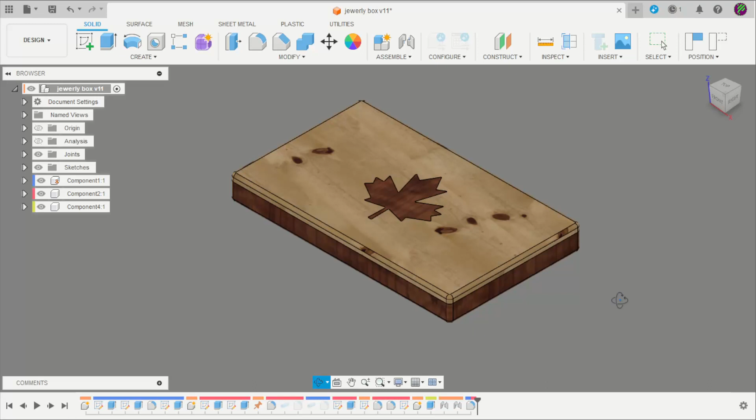For today I will show you how to create this project that is a jewelry box with the Canadian leaf. I will show you how to create these three parts and two methods how to create this emboss.

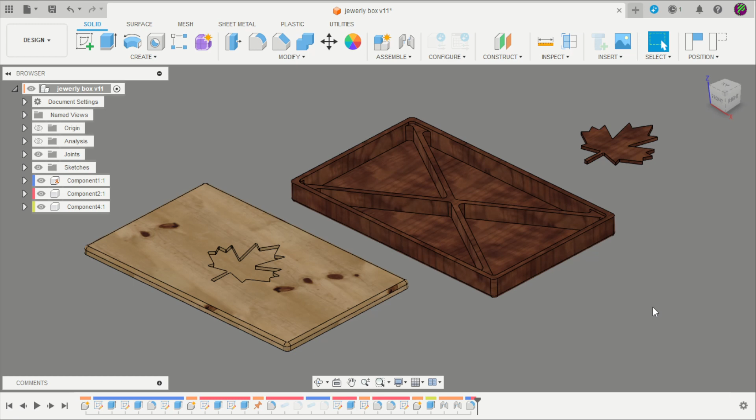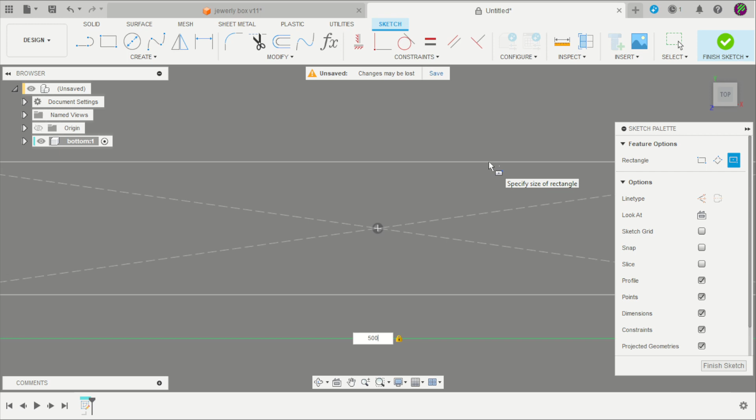Let's start. Create a new design. Create here a new component. I will call it bottom. Start to create a new sketch. A rectangle by the center. The first two measurements are 500 millimeters by 300 millimeters. Finish the sketch. Extrude with 40 millimeters.

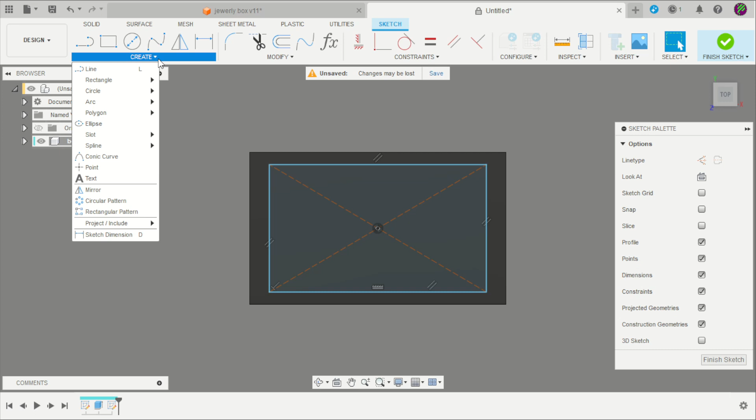Create a new sketch on the top face. Repeat the process with the rectangle. Here on the Create tab, select Project and project this top face, and apply here a distance of 10 millimeters here and here. Now we have our reference.

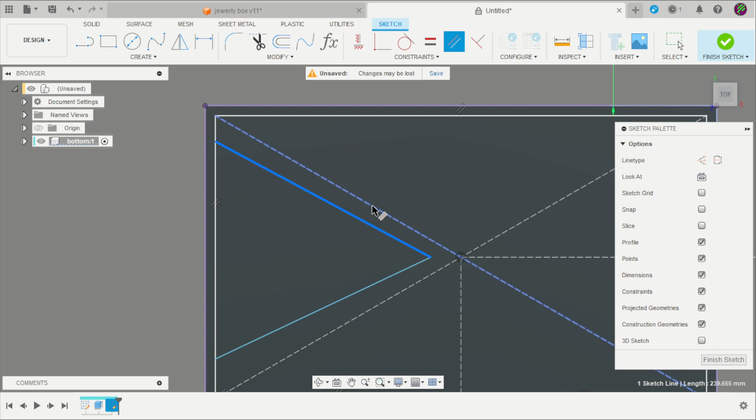Now we need to create two construction lines. Change here to construction. Click on the center. One line on the vertical, other line on the horizontal. Here, create another line, returning to normal, and create two lines like that, and apply a constraint of parallel, and that is parallel.

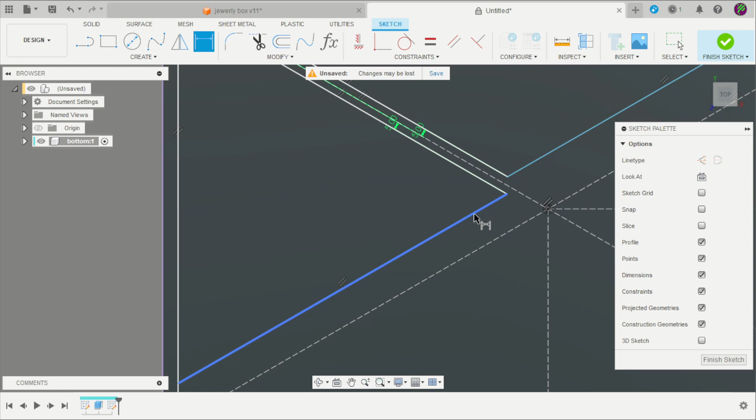The same for that triangle. Certify that the two are parallel, okay, and apply a distance of 5 millimeters. The same for that side. Here is 5 millimeters, and here is 5 millimeters. Okay, now we have these two triangles,

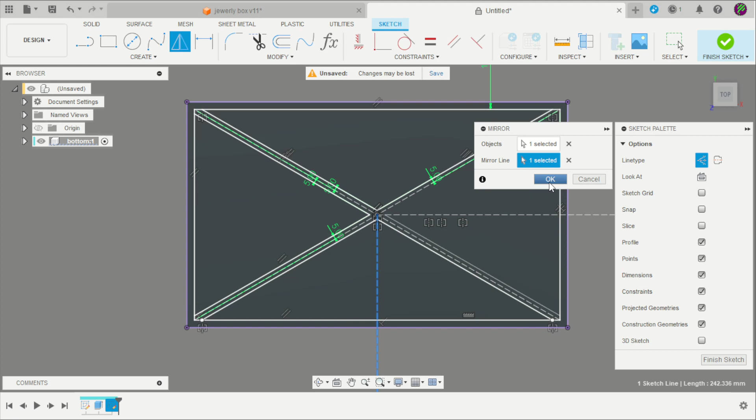and we will repeat using the mirror tool. Select the two lines, select the horizontal, and click OK. Repeat the mirror with these two lines that we created. Select the mirror line and click OK. Now we have these four triangles.

Finish the sketch. Select the extrude tool. Select all the triangles and apply minus 35 millimeters and remove the material. The measurement is here on the drawings. Now we need to apply a fillet of 8 millimeters.

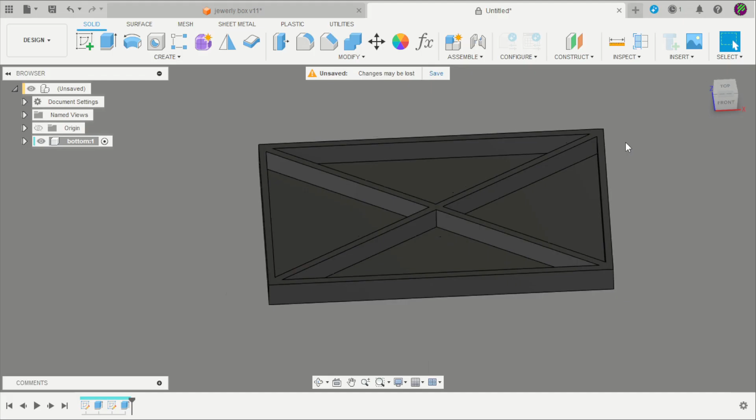Create a new sketch here on the top face. Create a new rectangle by the center. The same process that we did before. P for project and project these two lines here, and apply a distance of 10 millimeters here and here, 10 millimeters.

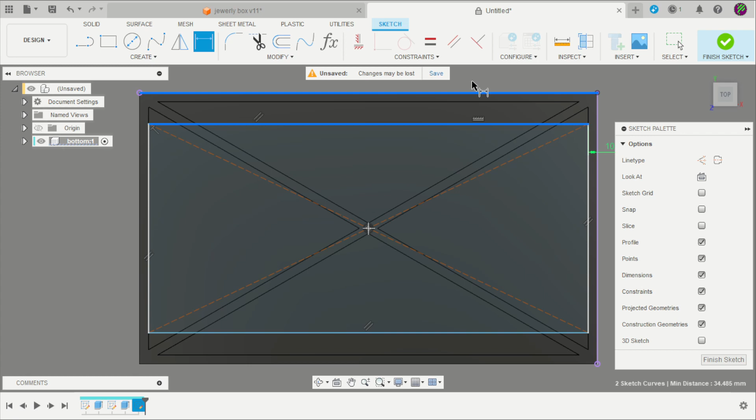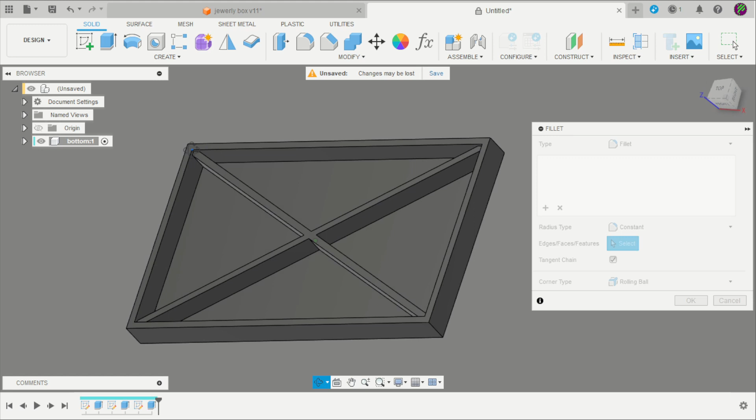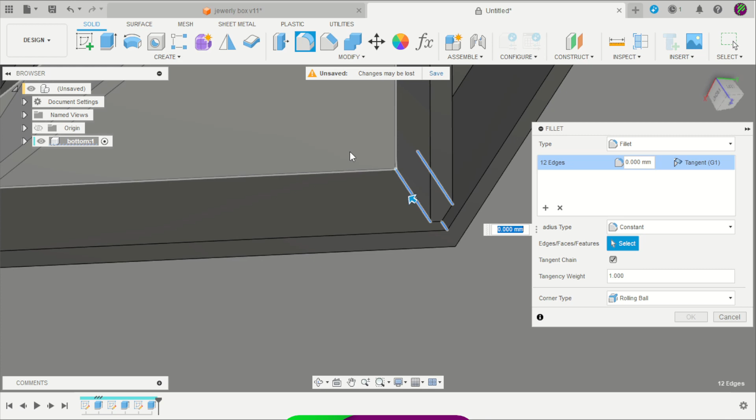Finish the sketch. E for extrude, select this and apply minus 5 millimeters to remove the material. Now we can apply a fillet. Select all these corners here, here, and here. Repeat that process here and here. And apply an 8 millimeter radius.

Create another fillet here, hold Control and select these edges in the middle. Hold Control and click on this edge and click OK. Okay, now we have this part done. And I will apply a fillet on these edges at the end of the project so that I can apply it to the two parts.

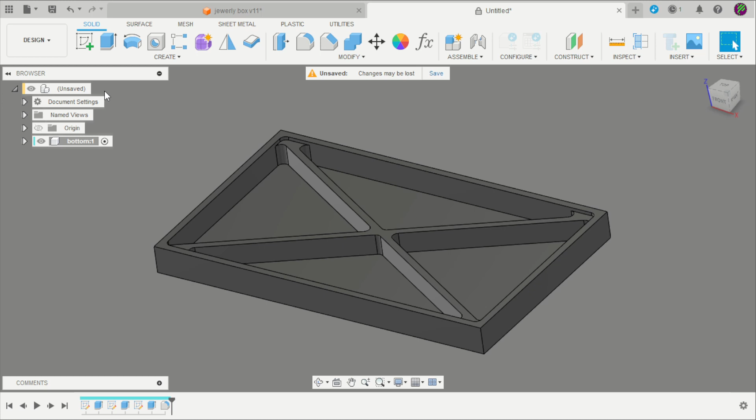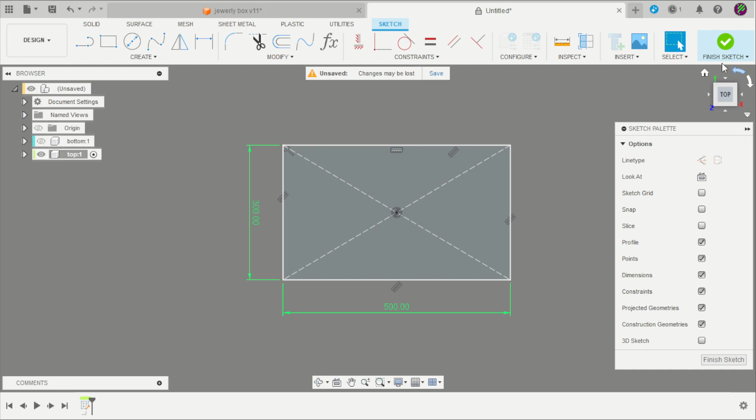Return here to the main project, create a new component that is top, hide the first one and create a new sketch. Repeat the process with the rectangle, the same measurements, 500 by 300. Finish the sketch. Now the measurement for that is 20 millimeters extrude. E for extrude, 20 millimeters.

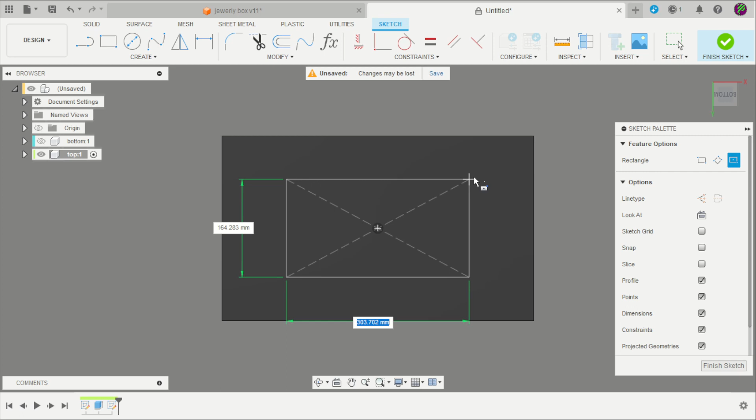Here on the bottom face, select to create a new sketch, a new rectangle by the center, here, and P for project the face, and apply here a distance of 10.3 millimeters, and here, 10.3 millimeters.

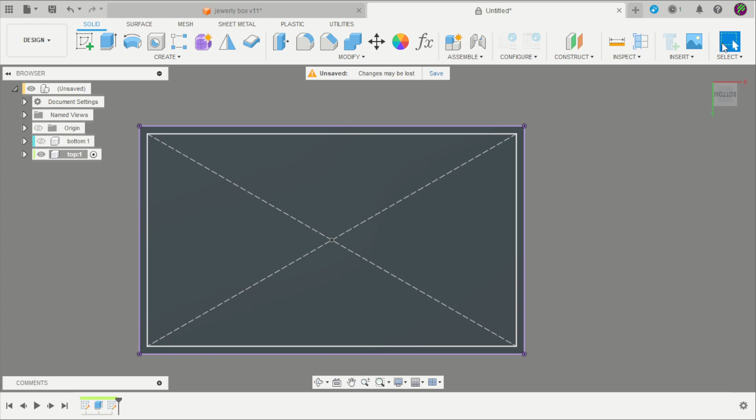Select the extrude tool, apply 5 millimeters, return to the main project, and unhide the first component.

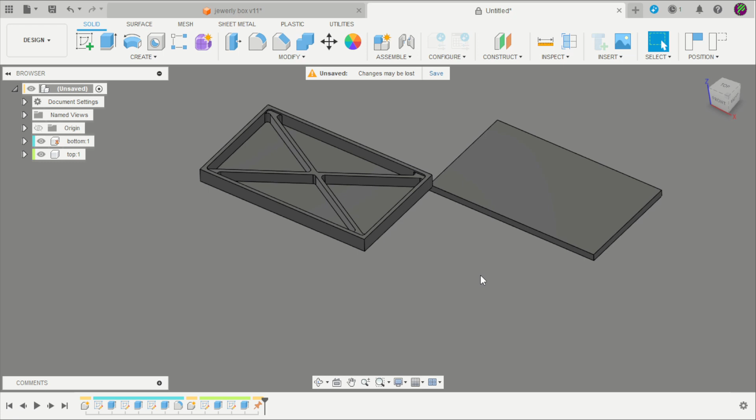This first one needs to be grounded so we can constrain the second one above the first. We'll do that now: press J for joint, hold control, click on the center point here, and do the same for that face, holding control on the center point.

To make it easier to identify the project, we can apply Shift N to create random colors. At that point, we can do these two processes to apply the emboss of the leaf.

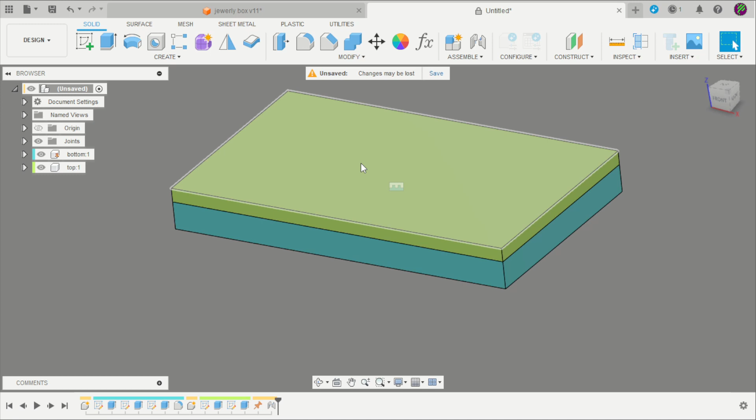We need to save first, here on the file of the leaf. I showed you in the last video how to design that. The link is here on the cards.

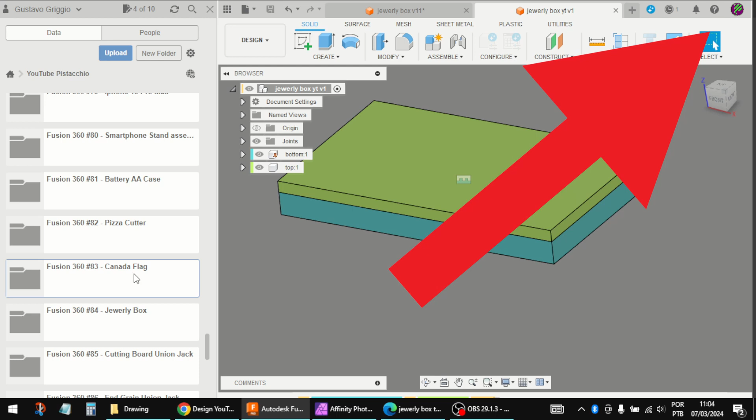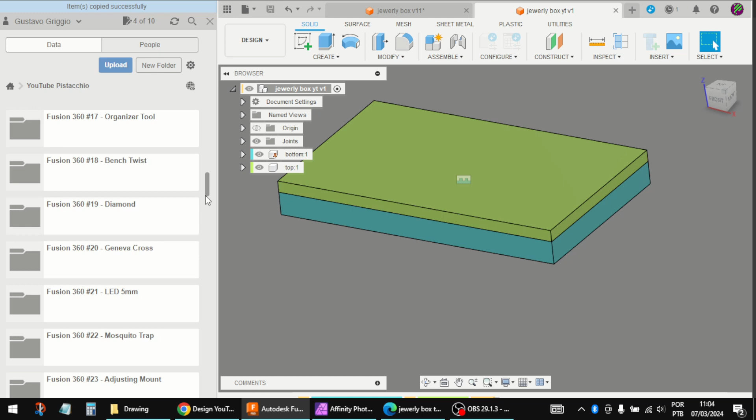Now, with the right button, we copy and choose paste, the jewelry box, and click copy. Return and paste here. Now we have a copy of the Canadian flag from the previous video on this project.

We have two methods to do that. I can import, just click and drag. The flag will be here, this component.

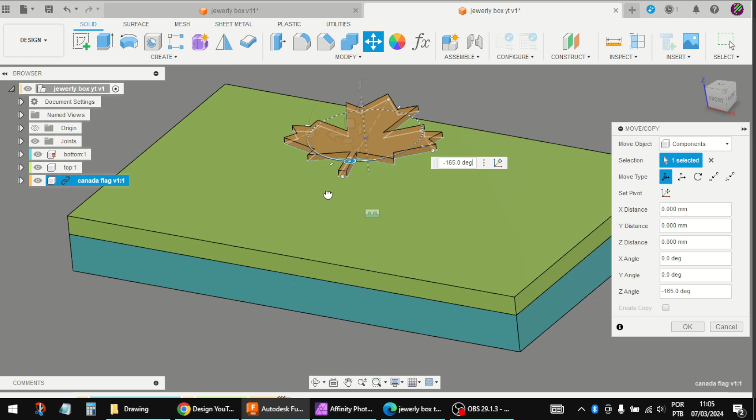I just need to click apply.

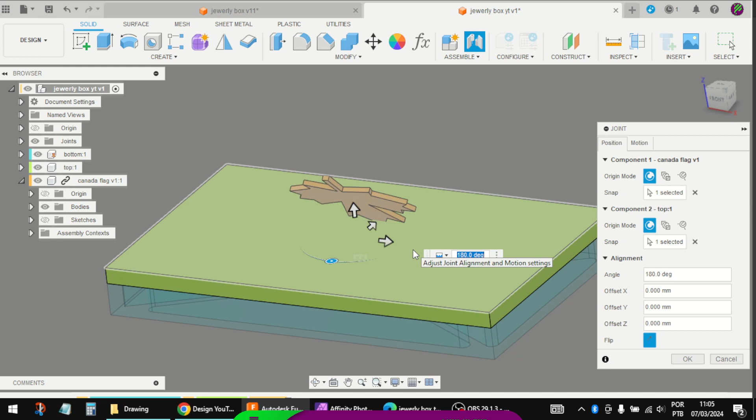You can hide this sketch and just click for the joint, hold control, select the center point, hold control on that face, flip the direction, and click OK.

Now we can use this combine tool. Select the target that we need to remove material from, and click on the leaf that we'll use to remove the material. Change this to cut.

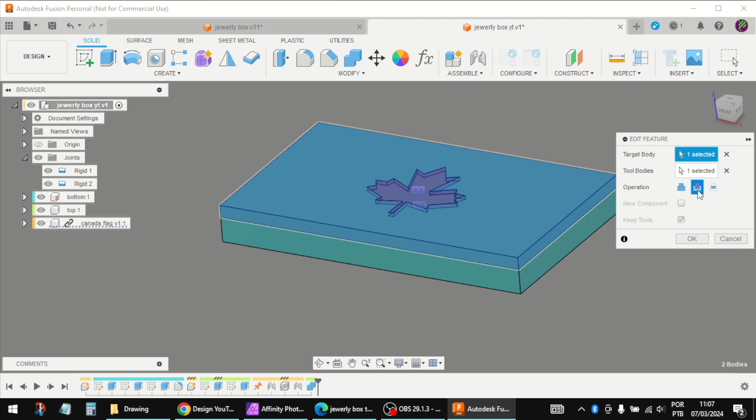Now I can suppress this joint and move it, and now I remove the material.

Or I can create it differently - I will delete this combine, that joint, and that component.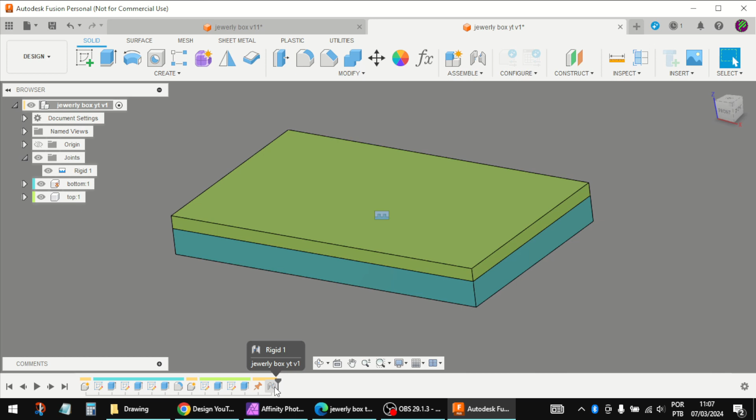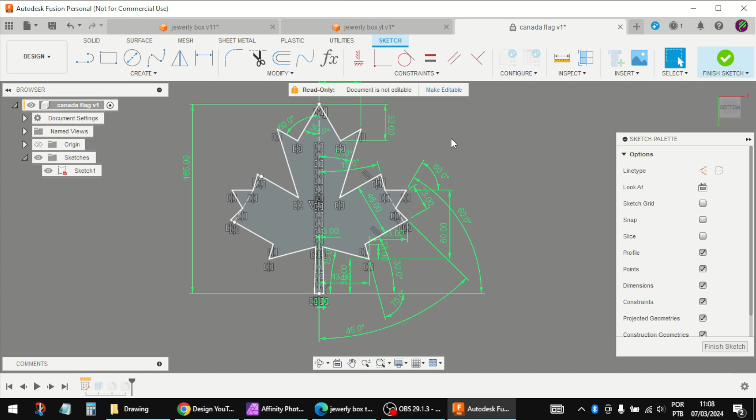Or you can go here on the project, just select the sketch that we created for this leaf, select all the lines here, and copy. Go to the project, here on the top component, hide the first one, create a new sketch, and click Ctrl V.

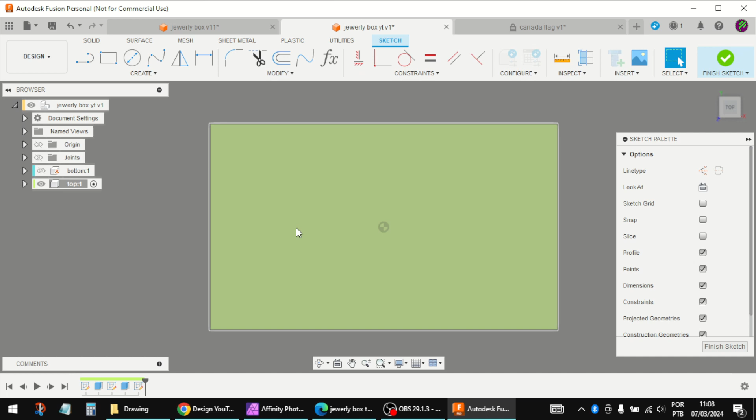Now you've created a copy of this sketch. You can rotate it if in your case it's not in the right position, or you can leave it as is.

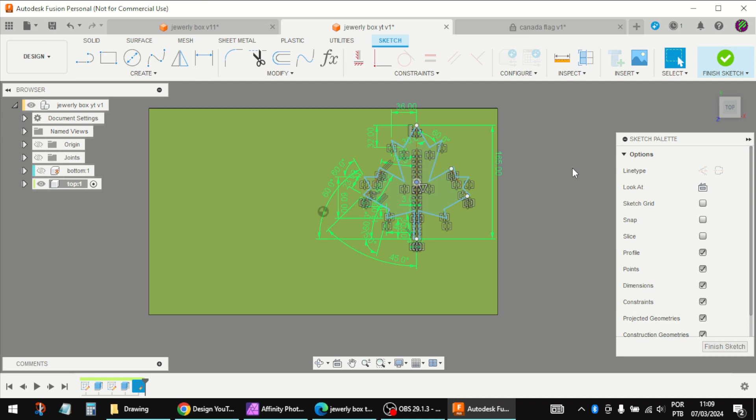But they are not constrained. Just create a coincidence here and here. Now it's in the right position.

Finish the sketch and extrude to remove the material, minus 6 millimeters. And now we have this emboss.

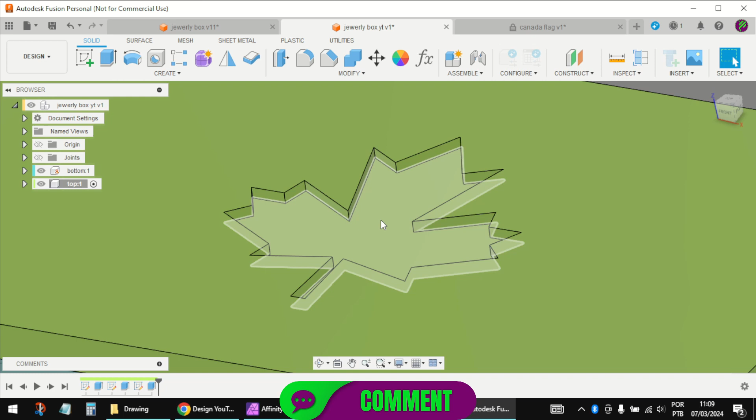You can apply a fillet here on that edge with 1 millimeter, and apply another fillet of 1 millimeter, and another fillet - that one here and here are 2 millimeters.

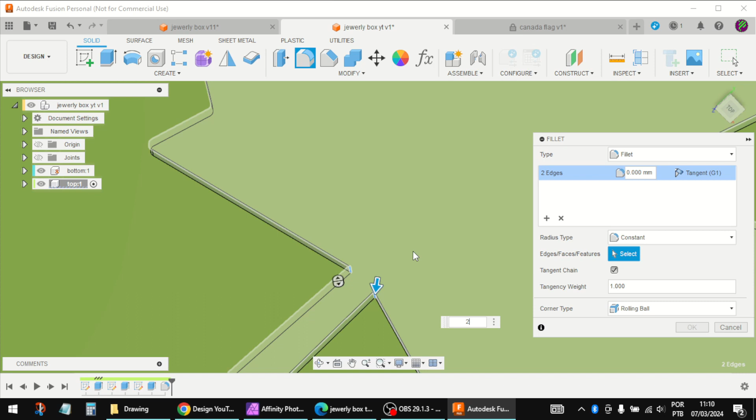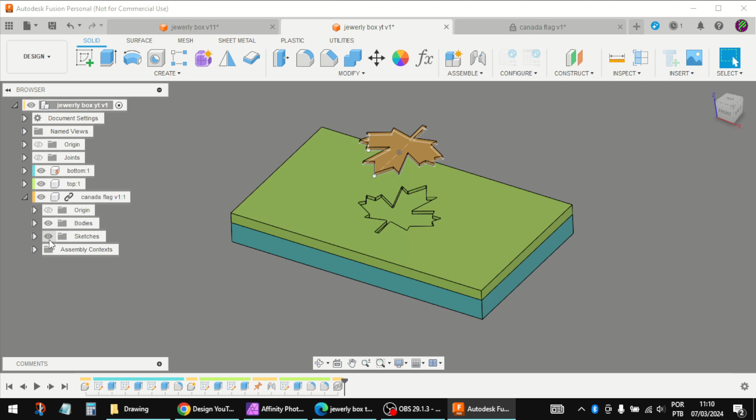Return here to the main project, import the Canadian flag, finish the sketch, confirm with confirm here, and hold Ctrl to repeat the process.

You can choose the process that you like more. The result will be the same.

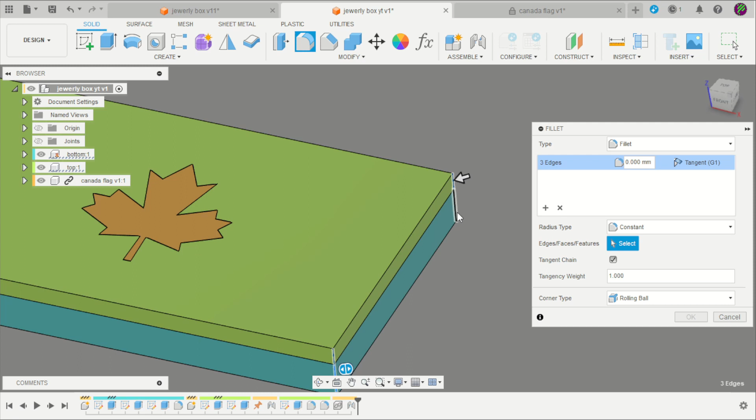Now we can apply some fillets here and here, these vertical ones - 8 millimeters - and the other ones on the edge are 6 millimeters.

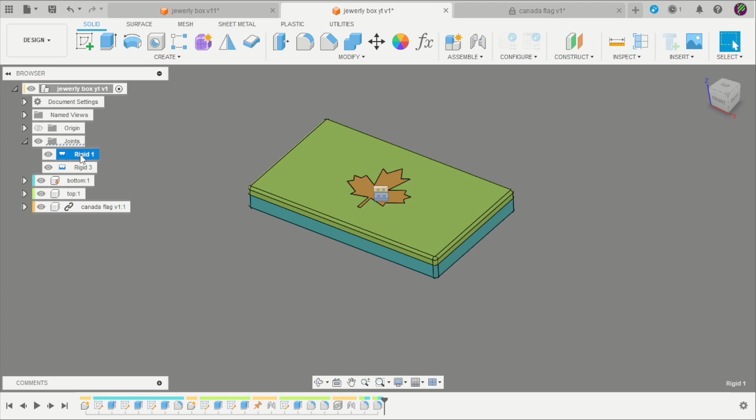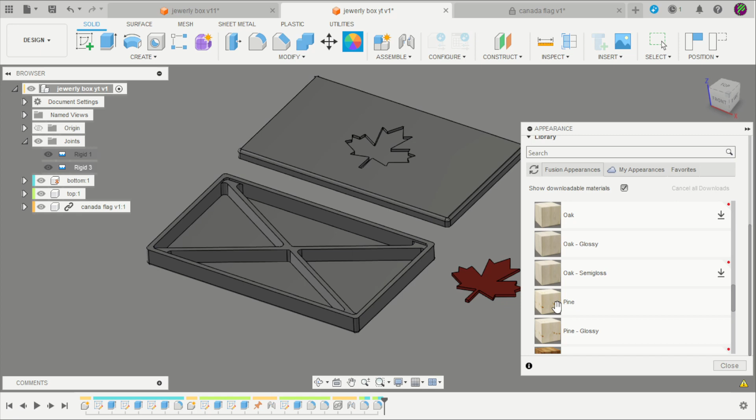You can suppress here to move and see the whole project, and apply some colors. I like to use the pine, the cherry gloss here and here, and the pine here on top.

Shift N to return to the standard colors that you applied, and we can change a little bit the scale. Be better.

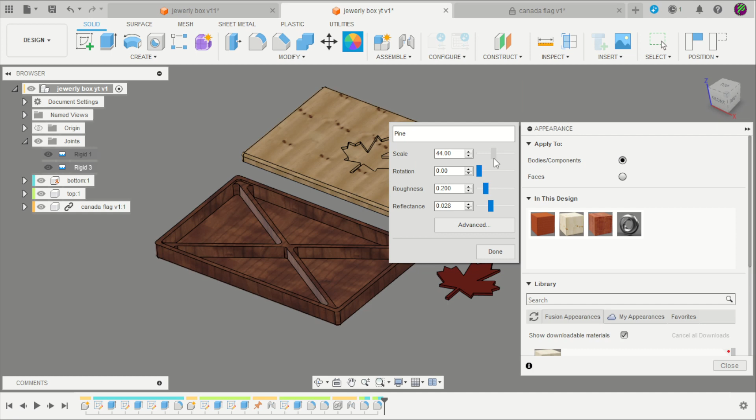And here on the pine, to be more realistic here. Finish the sketch, select these two, and unsuppress and hide.

Now we have this project finished.